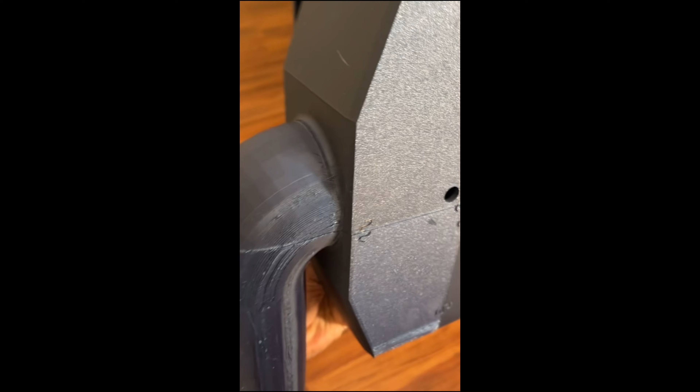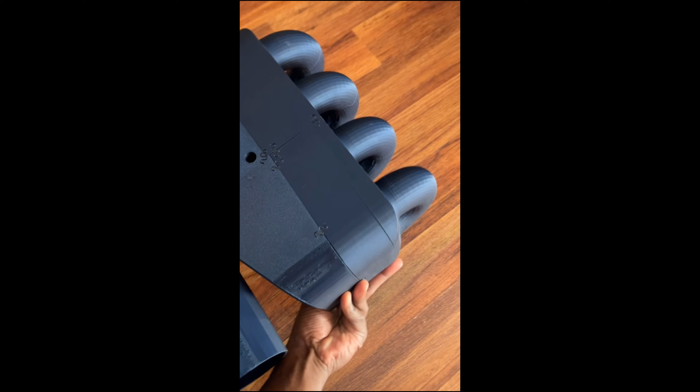All right, so I got it in, more or less, and we got to make some adjustments. As expected, I expected it not to fit the way I really wanted it to. But this is the first one printed, so this is what it looks like.

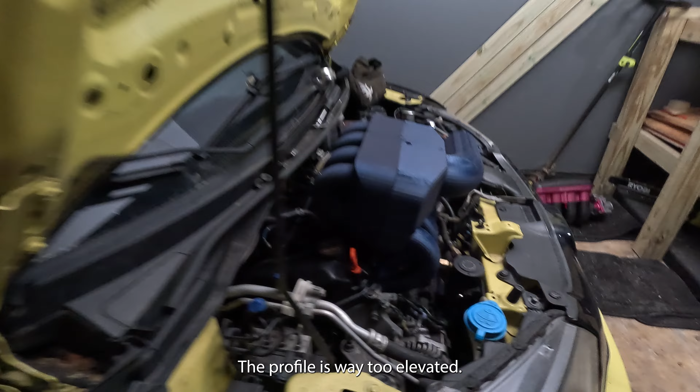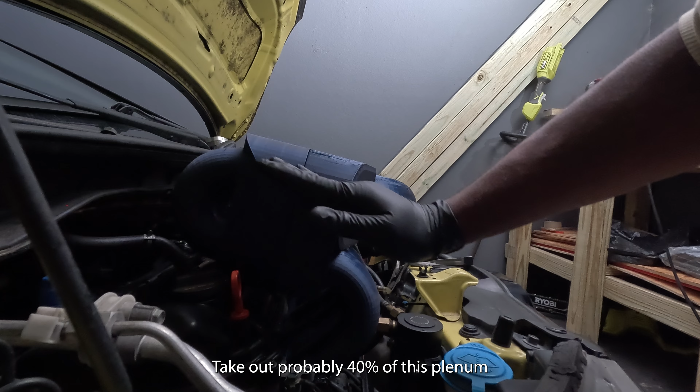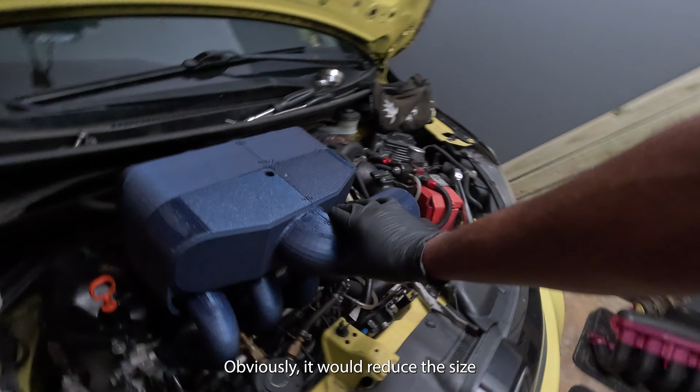The profile is way too elevated, so I'm thinking maybe I can take out probably 40% of the plenum to angle it down just a little bit, like this. Put a little plane in there, and that will cause it to reduce the size of this intake right here. It would bring it down in size to be closer to the original throttle body size that we have on that guy there.

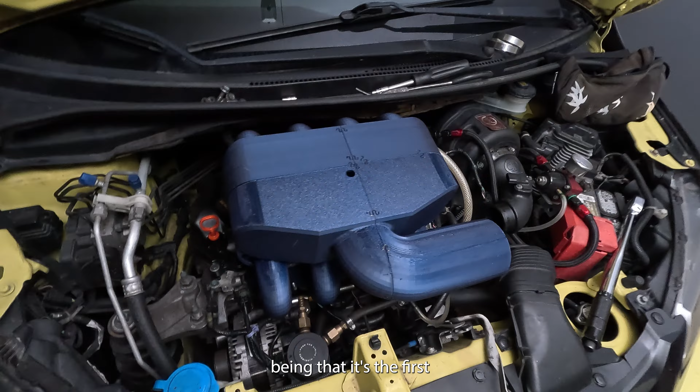Being that it's the first one, it doesn't look impossible, right? It doesn't look bad, doesn't look impossible. It's just a little big.

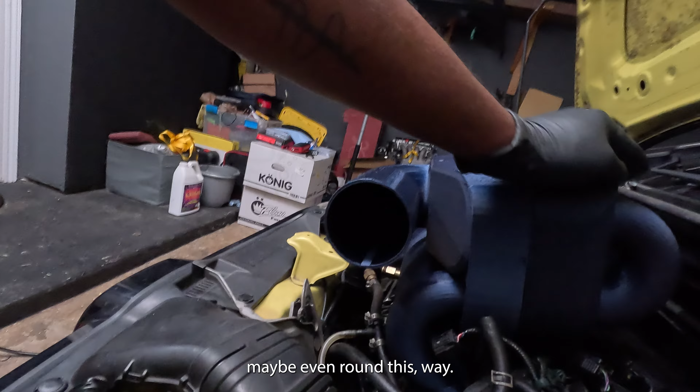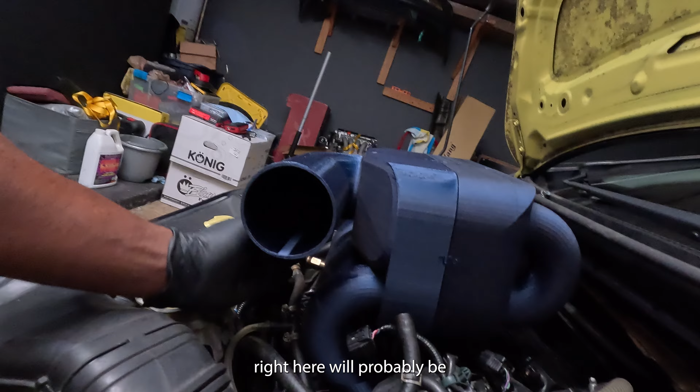So what I'll do, like I said, is try and angle just the plenum, maybe even round this out, like have this part of the runner be the edge and kind of just angle it down like this. And then this whole inlet right here will probably be smaller in diameter and then kind of lower on this part here.

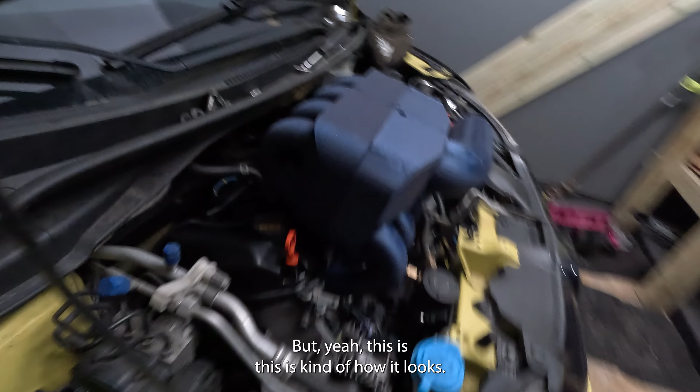That's the idea. I might do it a different way, but if you guys got any ideas, let me know. But yeah, this is kind of how it looks. I mean, it clears fine in the back here. Clears just fine in the back. Very good clearance, like all around.

You know, I can even put port injection spots right here along this, potentially anyway, if I can get the size of the overall body to fit. That's the update.

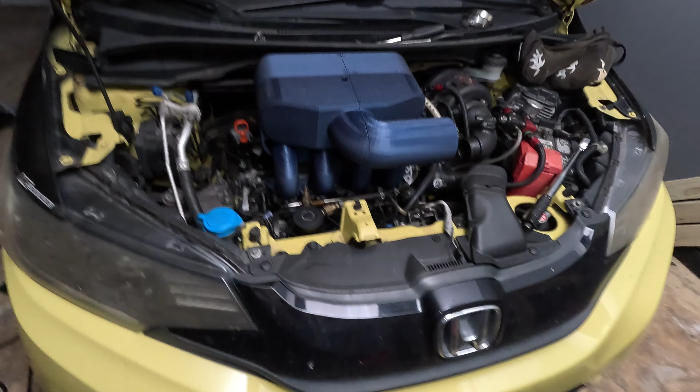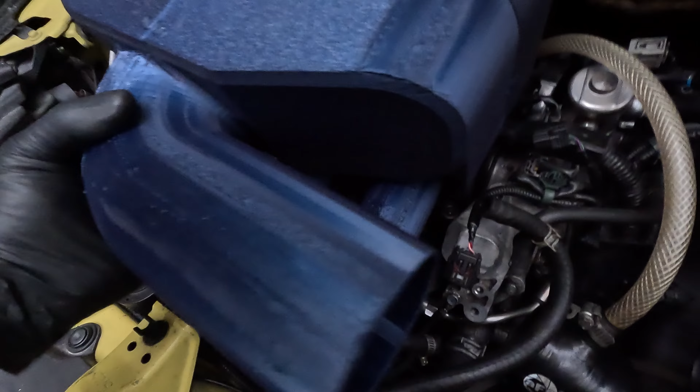But let me show you also another thing that I need to adjust here. See if I can get this off with one hand. I use those cardboards to hold it in place here.

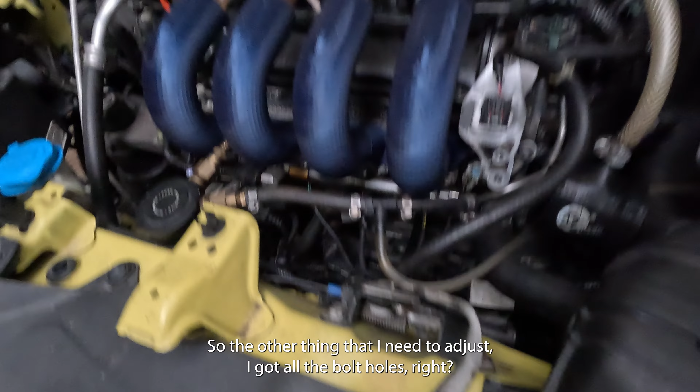So the other thing that I need to adjust, I got all the bolt holes right except the end ones. So this one's not lined up properly, and the one on the end over here is not lined up properly. But the center and the two here are pretty spot on. Overall, though, like I said, it's a very promising look.

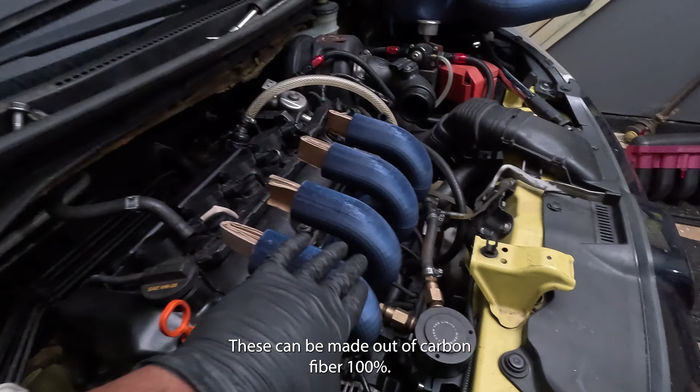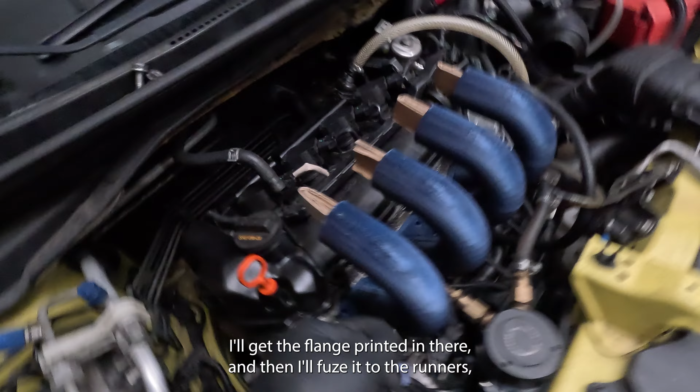These can be made out of carbon fiber, 100%. I'll probably get this flange made out of the same material that the Ultem 9085 printed. I'll get the flange printed in that, and then I'll fuse it to the runners, which would be made out of carbon fiber. Most likely I'll have the body also made out of carbon fiber, depending on how I can split up the body, where some of it could be Ultem, some of it could be carbon fiber, but it'd be a cool look.

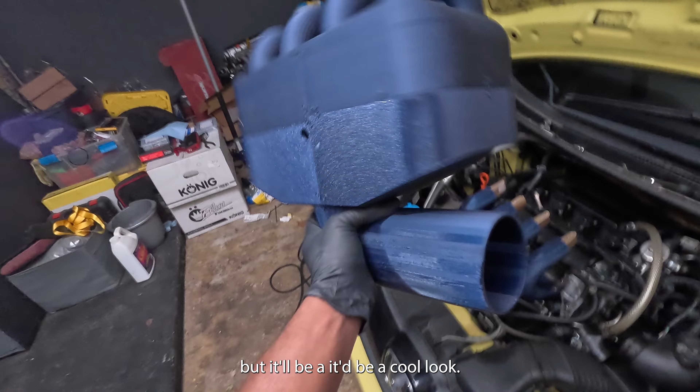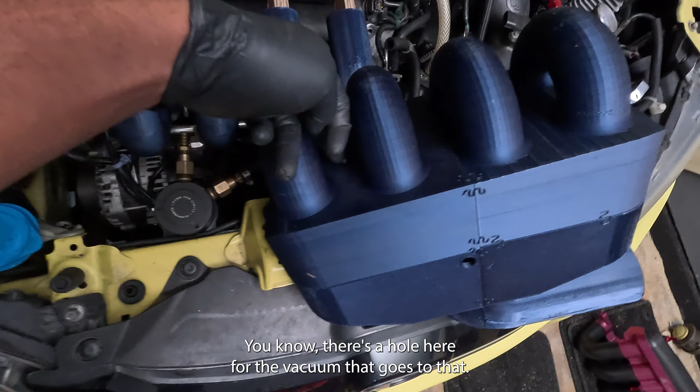So yeah, even with these holes, I was trying to mimic the ports, or the vacuum and blow-by ports. There's a hole here for the vacuum that goes to that, and then this blow-by nipple there. That's that.

I know it's somewhat underwhelming, somewhat disappointing, but at the same time it's very much exciting, because this is probably one out of three iterations of the part, and being that it's the first, it turned out wonderfully. I just started learning SolidWorks literally with this project. I'm super excited, and there's so much more potential.

So that's that, guys. This is Can't Fit with the Honda Fit and an intake that will fit at some point. And I'll see y'all in the next one. All right.